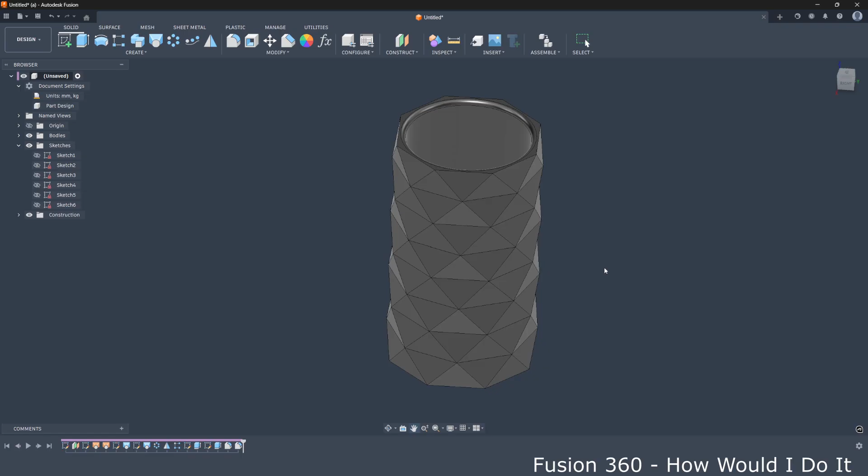In this video we will create this geometric decorative container in Fusion using a very simple and beginner-friendly method. This model might look complex, but it's actually very simple to create it, and it is designed specifically for clean 3D printing without support. So let's start.

First we will create a sketch in this horizontal plane. We go to create and we will use this polygon inscribed into circle. So we select inscribed polygon, click on this center point. We will have 8 sides of polygon. Radius will be 30 millimeters.

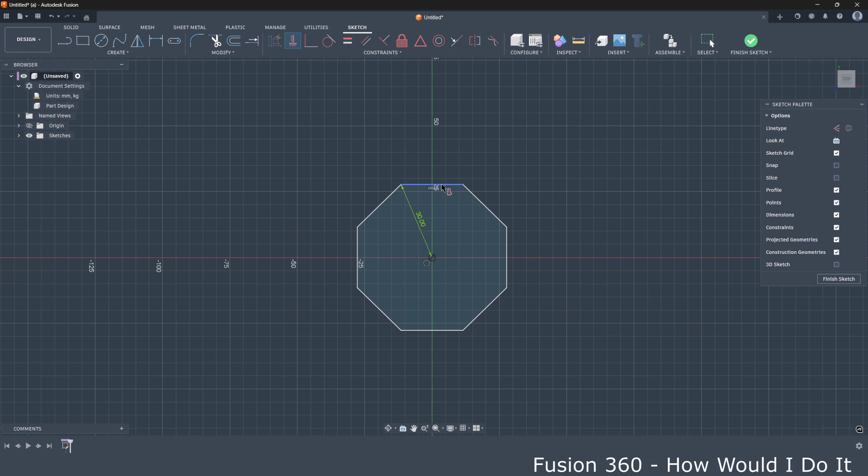I will now use this horizontal constraint and click on this side so it is positioned like this, and we will finish sketch. Now we will create offset plane. We go here and we will select this plane and offset 13 millimeters and press OK.

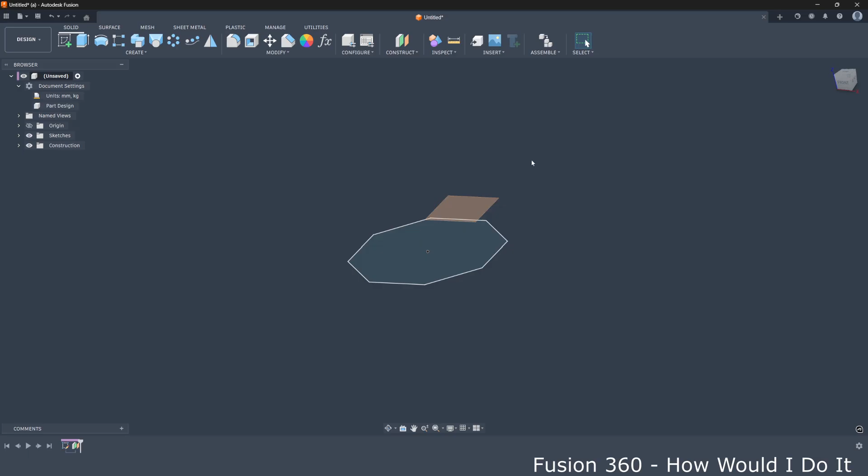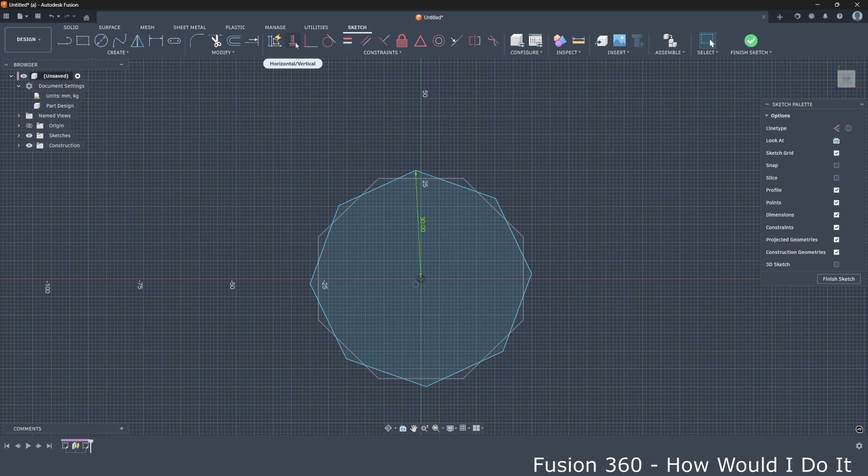Now in this new offset plane we will create a new sketch, and again we go to polygon, inscribed polygon. We will again click on this center point, and we will also have 8 sides, the same radius 30 millimeters, and we will create it as this. And now we will use this constraint again, but instead of this side we will use it on this point and this point, and we now have this second sketch fully constrained.

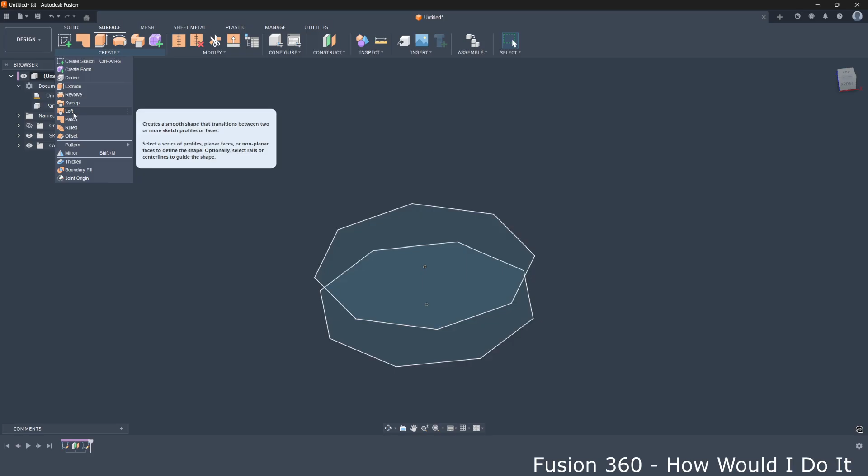We will finish sketch and we go to surface now. We will create loft. So we will first select this edge and this point, and we will have loft like this, and we will press OK.

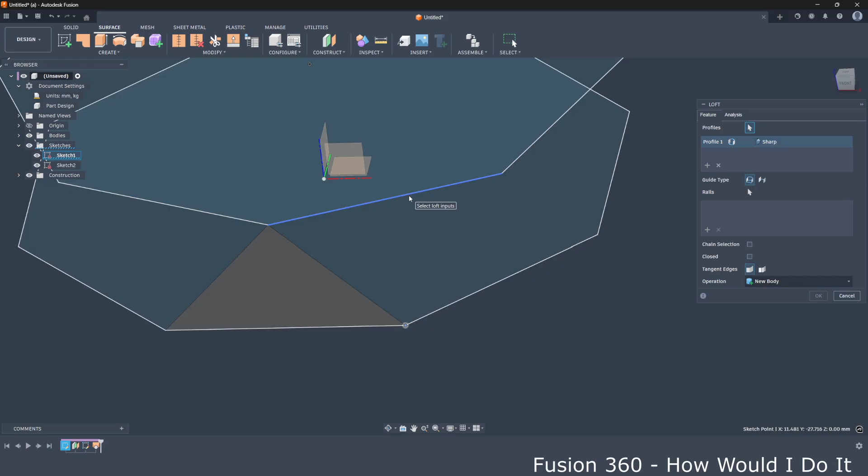Now we will unhide these 2 sketches and create one more loft. Again, create loft. Now we will have this point and this side, and we will create this second loft. Now we don't need these 2 sketches anymore, so we will hide them.

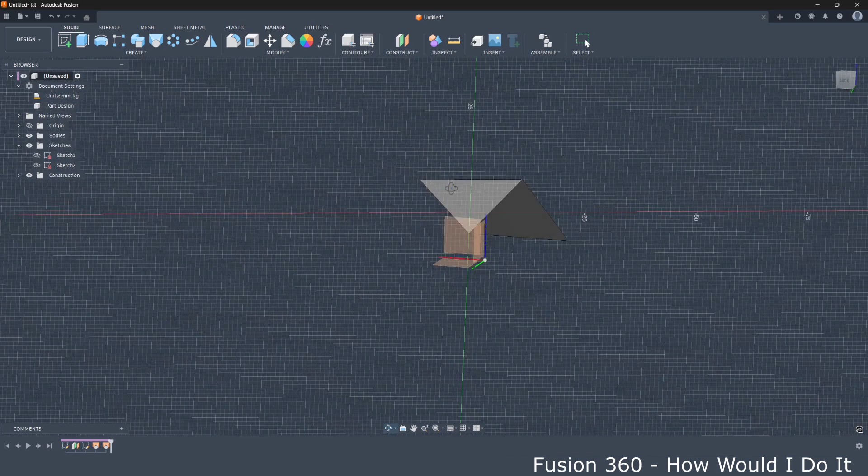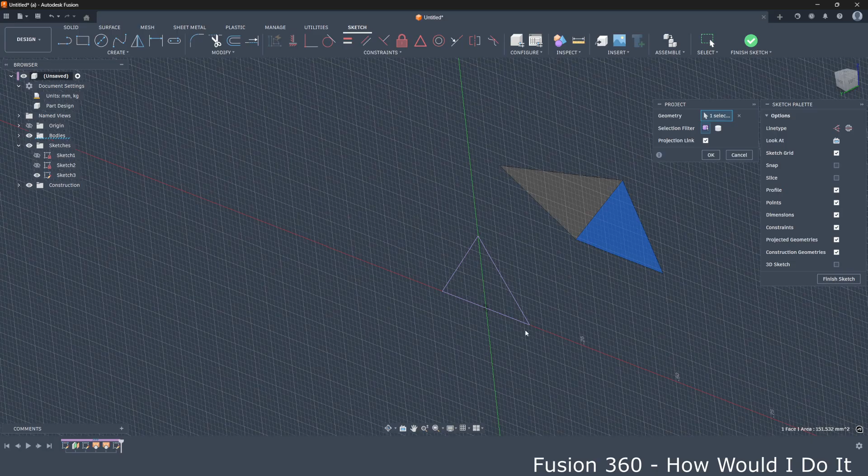And we will go to solid and create new sketch, but now in this plane. So we choose this plane that looks at these 2 objects that we just created. So it's this plane, and we will project geometry. We can go here and project, include, and select project, and we will just click on this triangle, and we already have this sketch projected to our plane, and we press OK now and finish sketch.

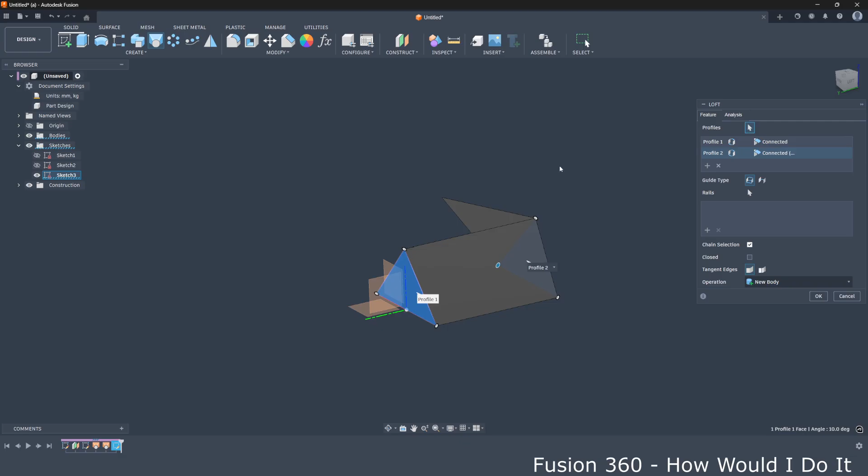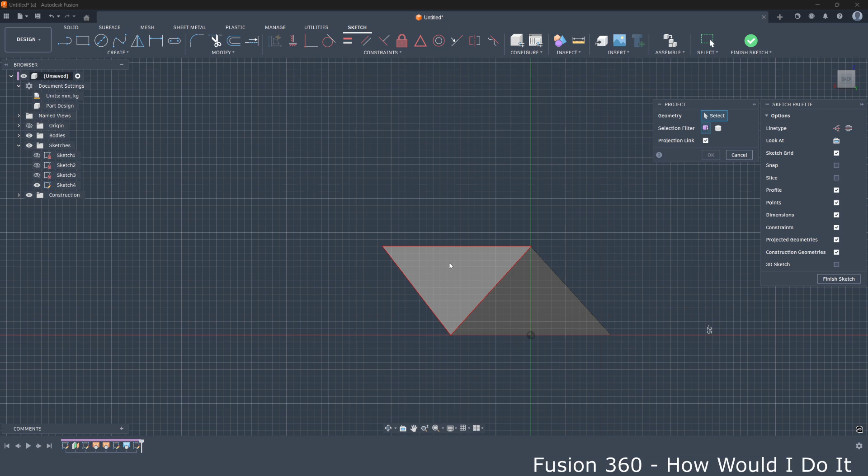And now we will create a loft between this profile and this profile, and we have this loft created like this, and press OK. Now we will create one more sketch again in the same plane, and we will project now this object to that plane. So go to create, project, and just press on this surface, and we have this object projected, and press OK. We will now finish sketch.

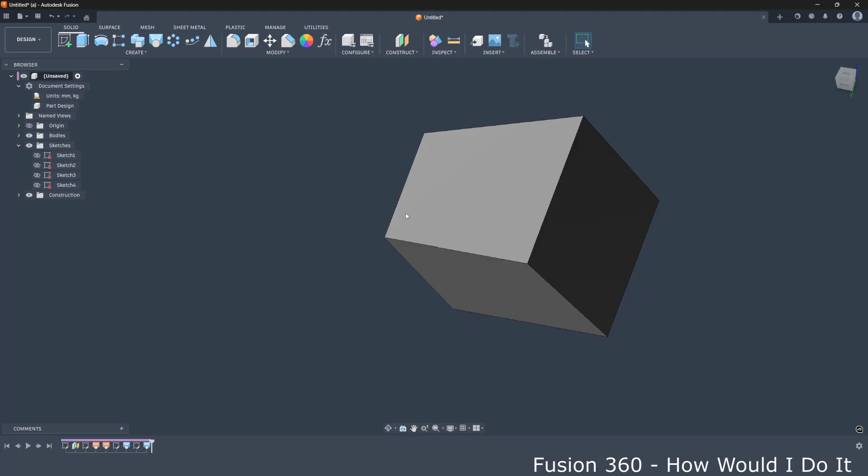Again we go to create, or we just use loft here, select this profile and this profile, and we have it lofted. So now we have this object.

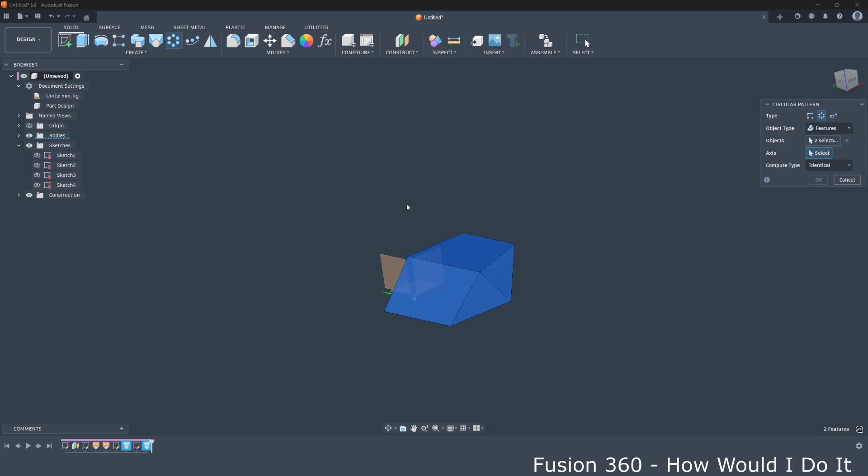Next we will create circular pattern, and here for object type, instead of bodies, we will select features, and in timeline we will select these 2 lofts. For axis we will select this vertical axis, and for quantity we will select 8. As you remember, we created at start an 8 sides polygon, so for quantity we will type 8 here, and we got something like this.

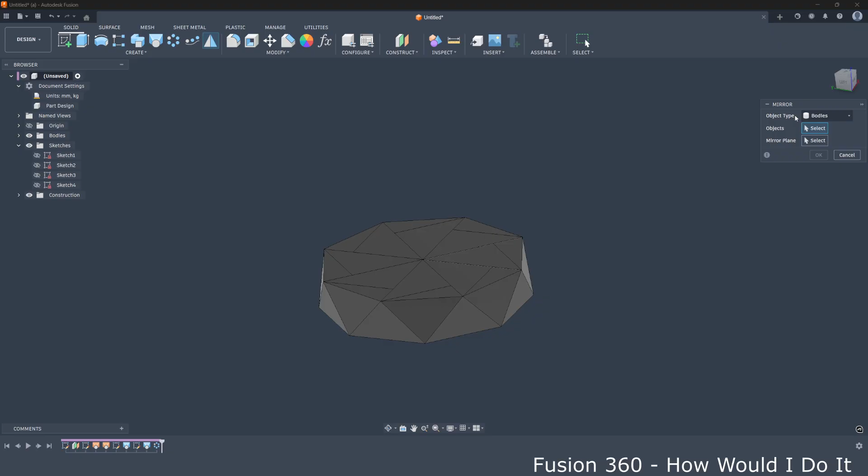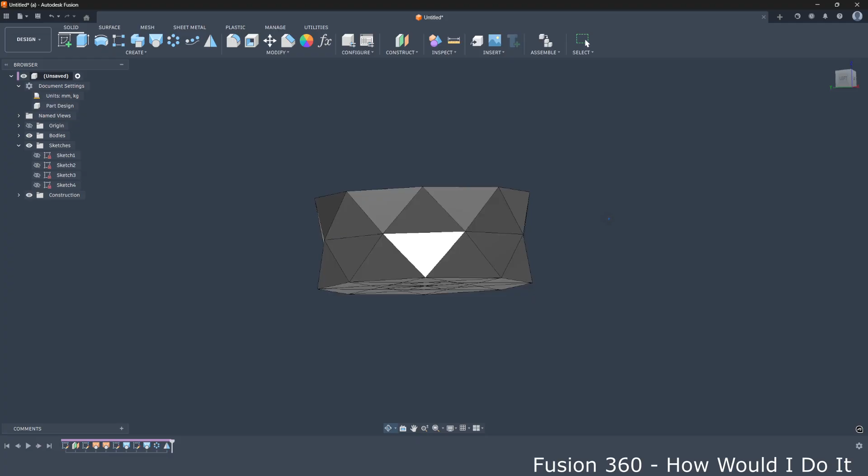Now we will create mirror. For object type we will select features and select these features in timeline. So circular pattern and these two lofts. For mirror plane we will select this plane and press OK. Now we have this.

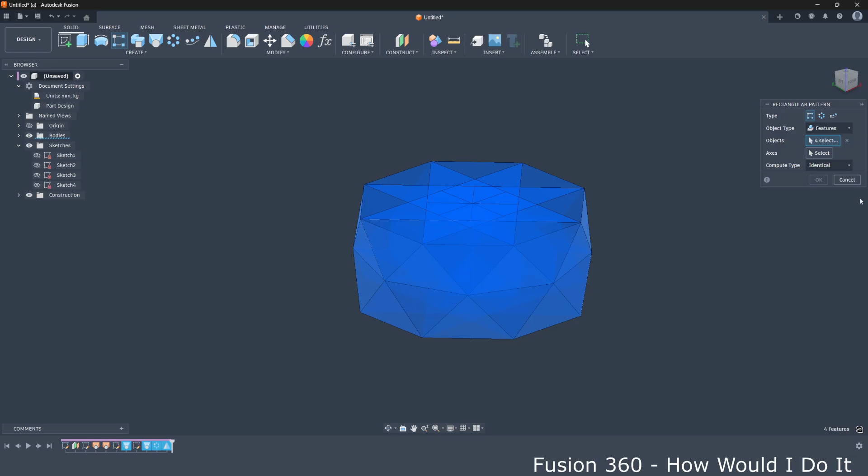Next we will use rectangular pattern. Instead of bodies we will select features. From timeline we will select these features, so mirror, circular pattern and these two lofts. For axis we will try to select this vertical axis. Instead of extent in distribution we will select spacing.

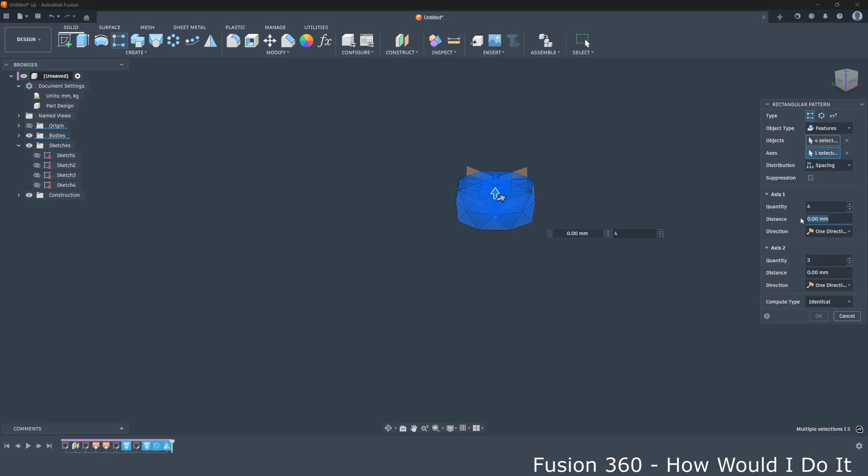For quantity we will select 4, and distance, as you remember, we created offset plane on 13 millimeters from this base plane. So 13 millimeters is here, and here it will be 26 millimeters. So here we will type 26. And now we have this pattern created.

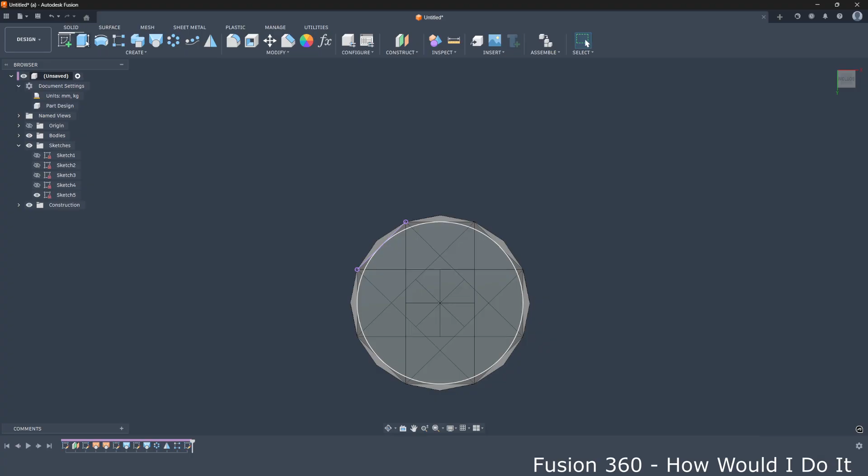What we can do at this point, I will do something like this. In this horizontal plane, so you can see, I will create a circle that goes to here. So it's tangent on one of these sides, one of these edges. And finish sketch. Now I will extrude this circle, this profile, to here.

But instead of cut, I will select join here. And let's see what we will get. We will get this clean surface here. So now we have this object.

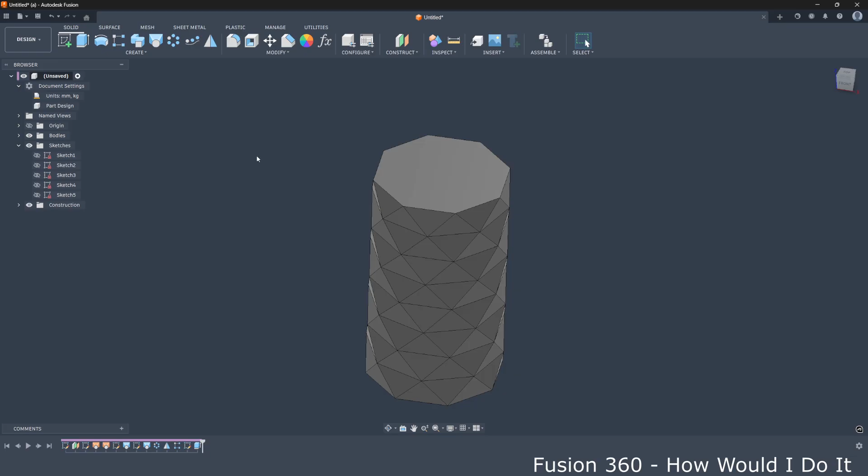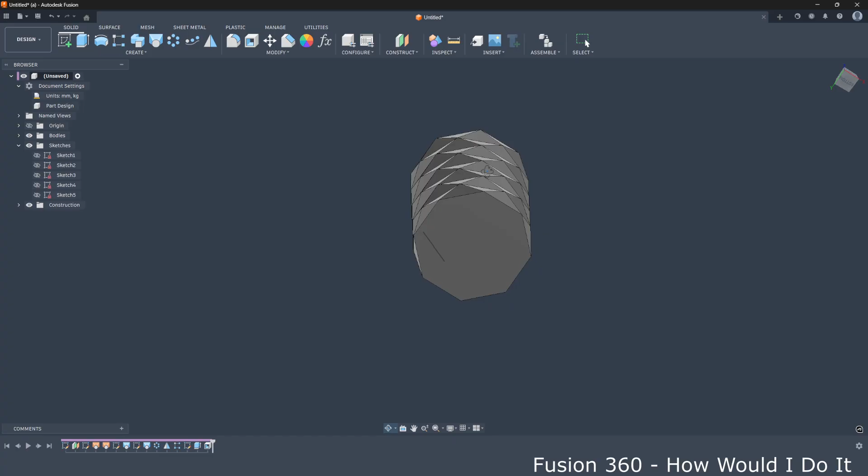We can now do something like this. We can select this command shell, click this surface and say maybe 5 millimeters. So we have this object created like this, with this inside structure. We can leave it as this, or I will go to second option, delete. I will delete this shell and create another plane and another sketch.

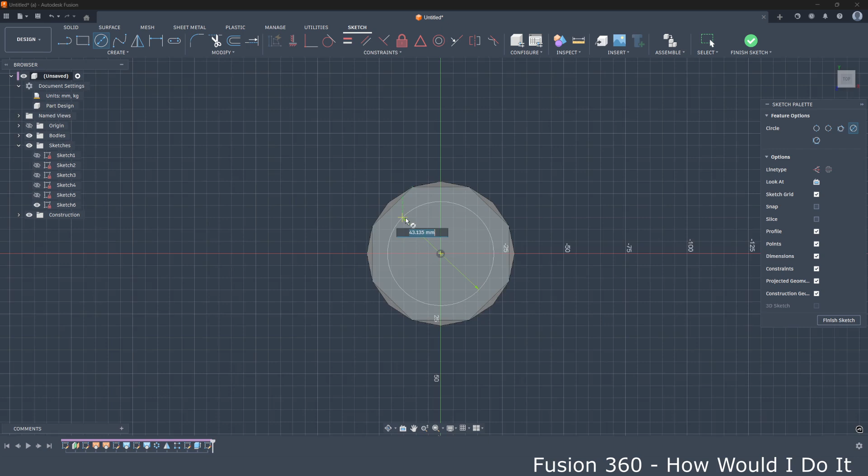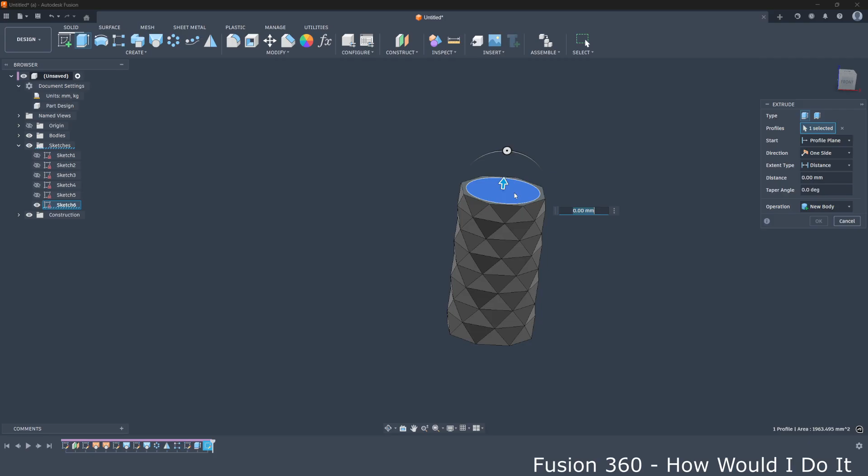Now in this plane, create circle here, and as we know, we had 60 millimeters diameter here, so I will create this circle maybe 50 millimeters diameter, and now I will finish sketch and extrude this profile down to maybe here and press OK.

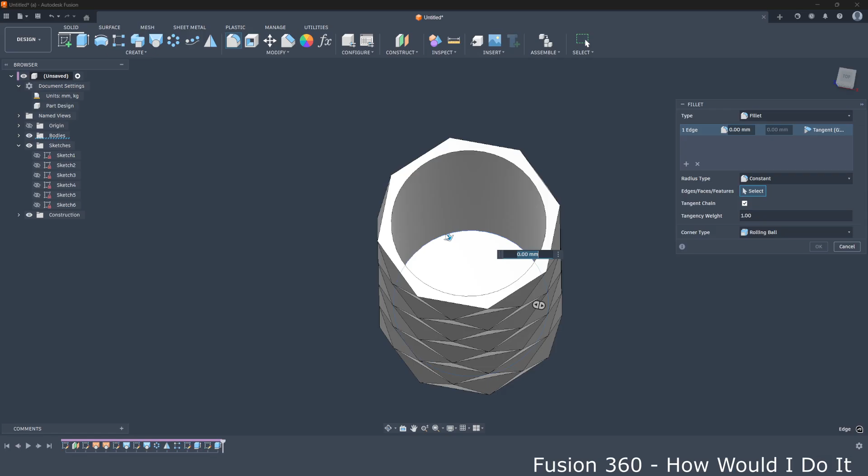What we have now, object like this created. So this wall thickness here is good for 3D printing. It's not too thin. Just I will fillet this edge with 5 millimeter fillet and this edge with maybe 2 millimeters. Yes, 2 millimeters is okay, and press OK. And we have our object created.